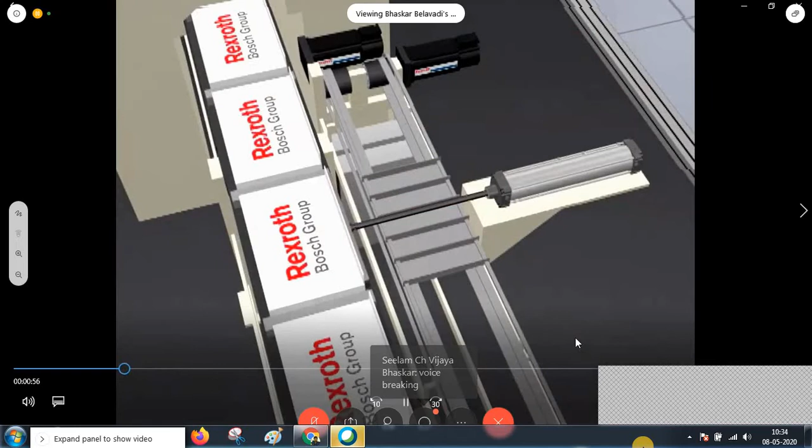Irrespective of whether you wish to produce and pack chocolate bars, fill bottles, or palletize yogurt for transportation, with Bosch Rexroth, the drive and control company, it's practically child's play. Why? Because it's at home in your branch as you are. Our optimized drive and control solutions will provide you with continuous and versatile automation.

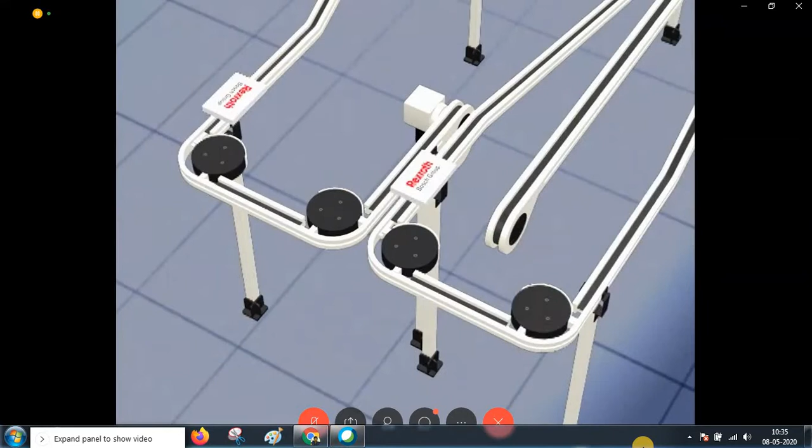An example of chocolate bar production will demonstrate the advantages of precisely aligned electrical, pneumatic, and mechanical drive technologies available from Rexroth, and show how productivity in your individual application can be boosted with increased clock rates, faster format changes, and higher product quality. Competence in total line automation.

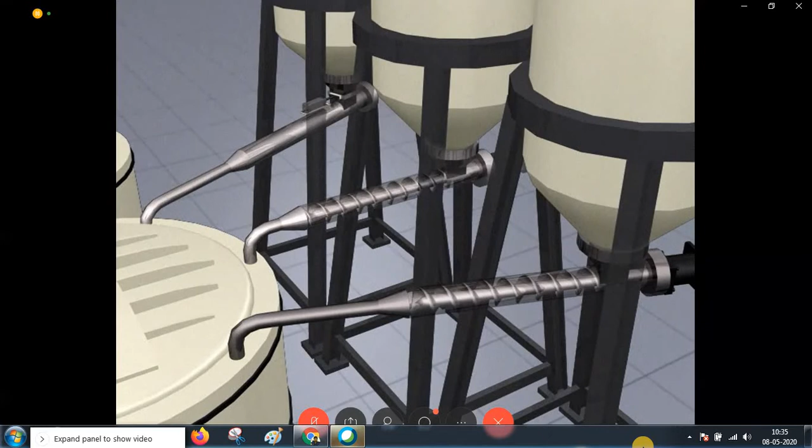Starting with making the raw chocolate mixture provides constantly high chocolate quality. At the start of the process, ingredients are continually fed to the mixer by way of speed-regulated drives for auger filling. Easy-to-clean, hygienic pneumatic cylinders are used to batch the ingredients to precisely match the recipe. Finally, high-performance Rexroth drives ensure the chocolate raw mixture is always homogeneous, both in the mixer and emulsifier.

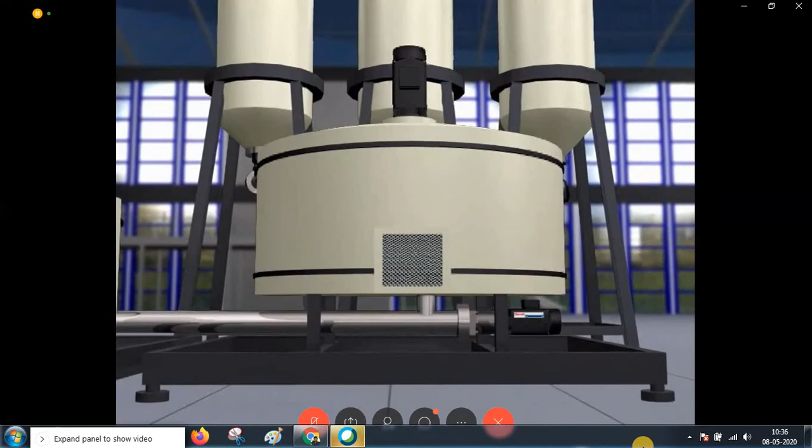Electrically driven transfer moves the mixture to the conching process. Here too, Rexroth drives are guarantors of a constantly high product quality.

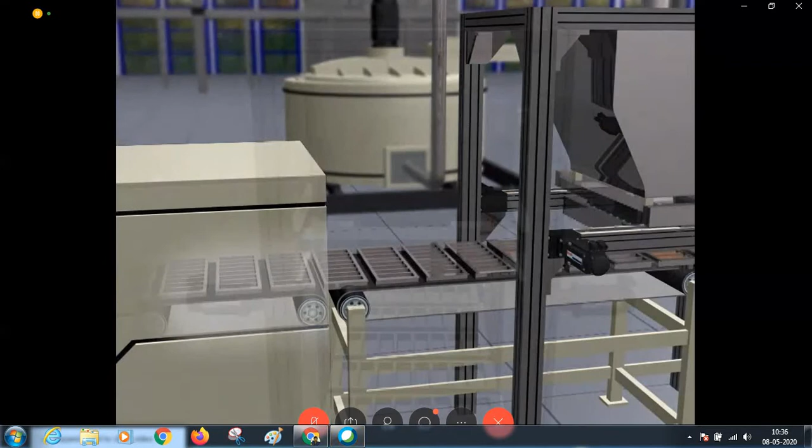Innovative automation concepts with digital servo drives, corrosion-resistant pneumatic cylinders and valves, as well as hygiene-compatible linear modules, ensure high-precision chocolate molding. Here, the intelligent control technology coordinates all movement processes. After the cooling process, highly dynamic linear motors decorate the bars to perfection in accordance with individual requirements.

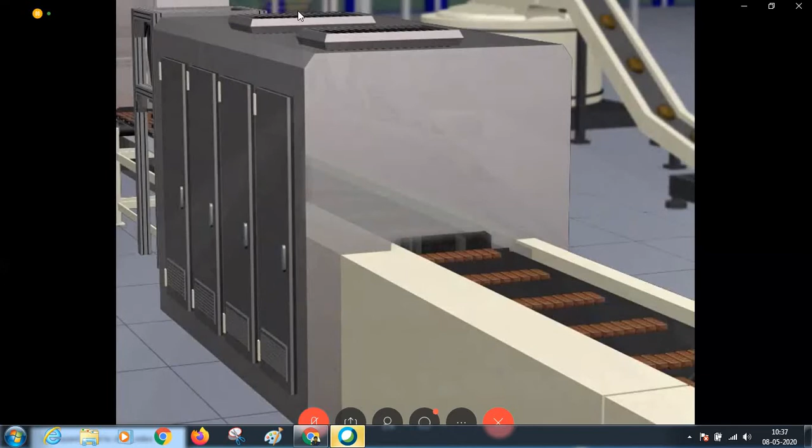After yet another cooling process, the electrical control and drive technology takes over the high-speed sorting of the chocolate bars. The result is precise, exact, uniform product spacing for the downstream packaging process, flow wrapping. Here, the continuous synchronization of product and package serves to provide perfect longitudinal and cross-sealing, thus subsequently an ideal presentation of the chocolate bar at the point of sale.

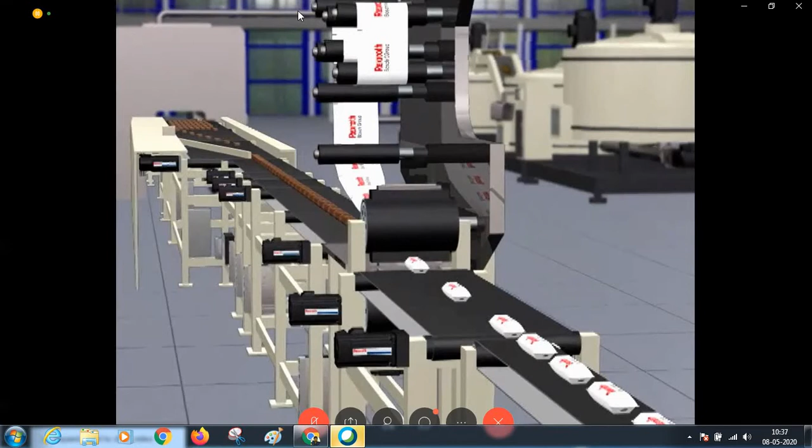Carton making places high demands on dynamics and accuracy. Rexroth guarantees increased clock rates through a perfect combination of electronics and pneumatics. The electrical drive and control technology synchronizes the magic belt and coordinates a protective infeed of the products into the secondary packaging process.

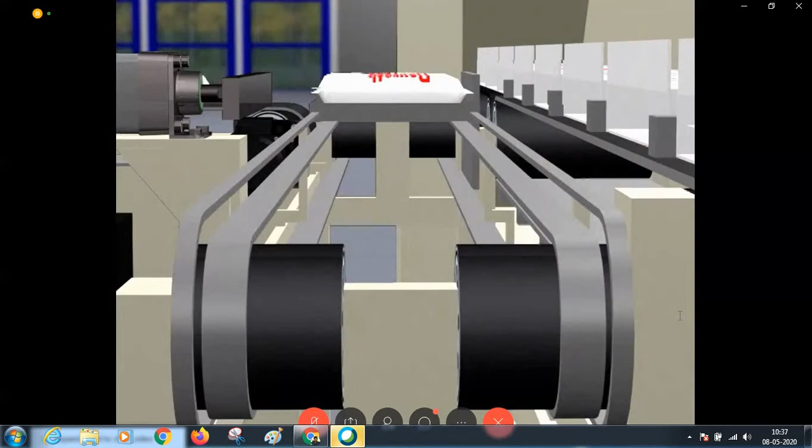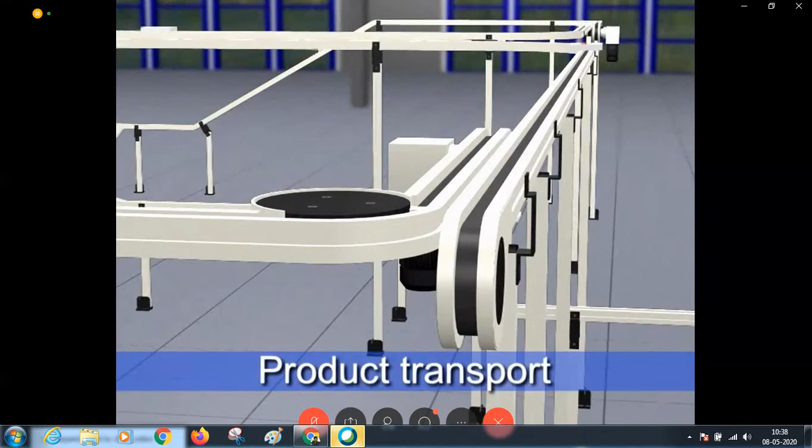All conveyor tasks related to the packaging process are mastered perfectly by the modular Rexroth chain conveyor system. It can be individually adapted to meet your product requirements, and because of its versatility, it's suitable for both horizontal and vertical product transport.

While pneumatic grippers make sure that the blanks of cartons are handled carefully, the intelligent servo drive technology and ready-to-install linear motion systems erect the cartons.

Fast SCARA robots made by Rexroth, with high-performance control, standard program interface, and integrated image processing, serve to make product handling more versatile during case packing.

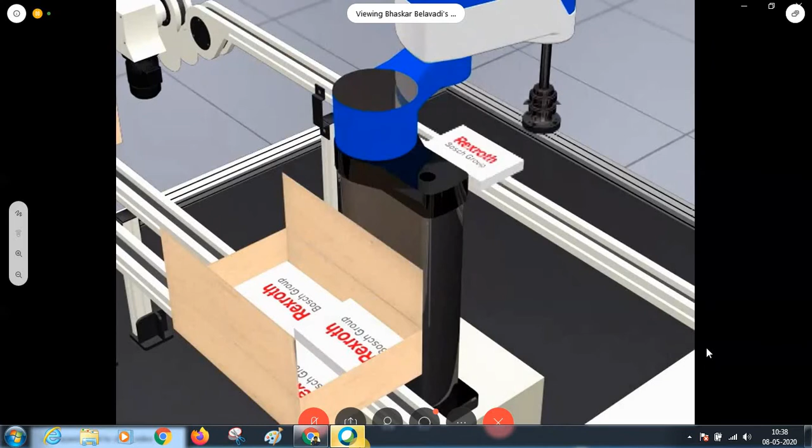Reliable, fast palletizing with gantry robots is an ideal example of our efficient automation solutions, economic from project planning to production. Integrated robotic functions into the control shorten both the project planning and startup times.

Safety fences made up from our modular aluminium profile construction kits are easy to handle, providing maximum protection for people working at the machine and on the transport paths.

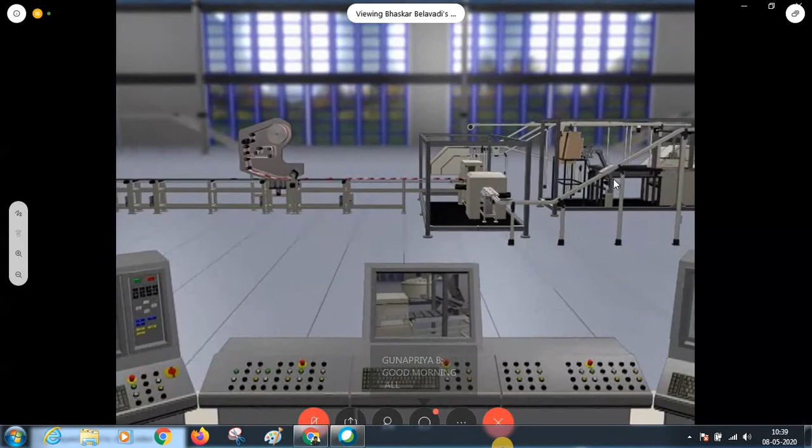Open motion logic solutions as provided by Rexroth provide greater transparency and efficiency in your production. Field buses standardize the connection to the local control systems of the production control center. Synchronization of the machines and individual units by means of cross-communication enables the modular design of innovative machine concepts to be realized. Networking the systems using Ethernet provides you with central access to all production technology relevant data.

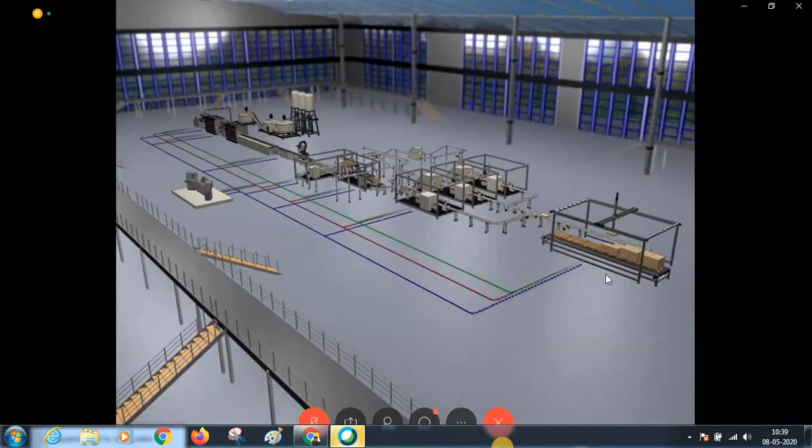You can count on our comprehensive technology solutions with best-in-class components and our local specialist teams around the world. Rexroth, competence in total line automation.

Okay, that was a small video about 6 to 8 minutes on automation. It was basically concentrating on the chocolate manufacturing and packaging industry.

So I think you got some feel about how industries deal with this automation, and why this automation is really required. Every day lots and lots of production is going to happen, and things need to be very precise. So if there is a lot of human intervention, obviously humans are more prone to error and commit a lot of mistakes. So a large production will have a kind of setback if too much human intervention is there. So automation is always kind of required.

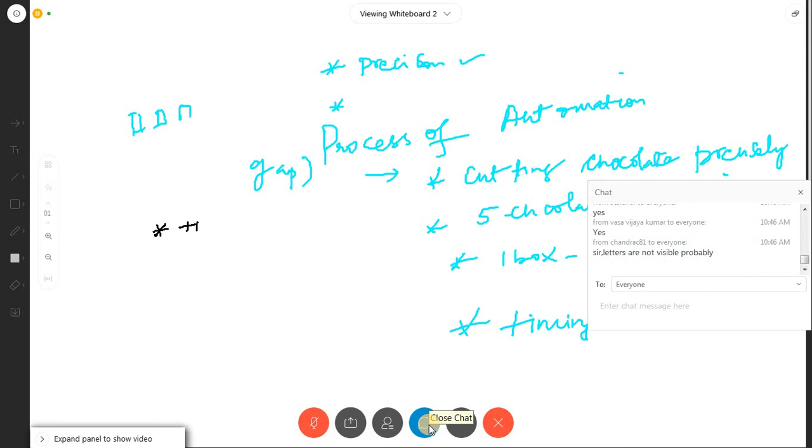So in simple way, I can just say be interested in timing. You would be interested in counting, and you would be interested in keeping all these things intact, like a proper control of the entire process. So all these things we are basically supposed to do in the process of automating any production unit. So now the thing is getting to know what automation involves in it. Timing is required, counting is required. The entire process needs to be controlled in the right way. So a lot of logic is all the time involved in doing all these things. So having said all these things, now I think we need to get into the actual automation.

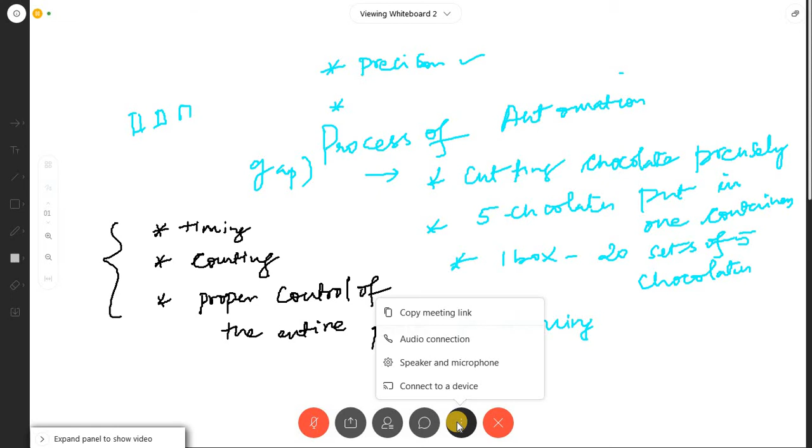Now we need to get into the actual automation thing, so where we will understand how automation is really achieved. So to again get to know how automation is, how the kind of industries were operating earlier, I would like to again show you one more small presentation where you will get to know how it was earlier and how it is now.

Are you guys able to see this?

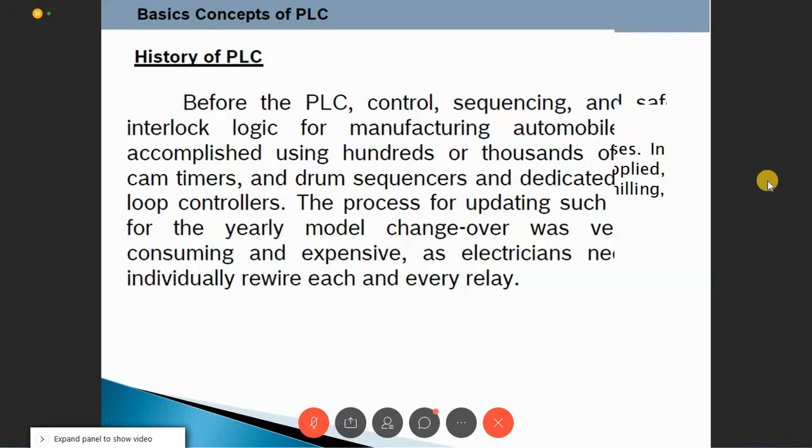So now the concept of PLC has come into picture. The PLC is basically a kind of computer, I can say, which controls industrial machines and processes. And in different areas of industry, PLCs are basically being applied, like in case of handling materials, packaging, palletizing, milling, boring, grinding, filling, sorting. You take any kind of operation that happens in industry, everywhere this PLC is basically used.

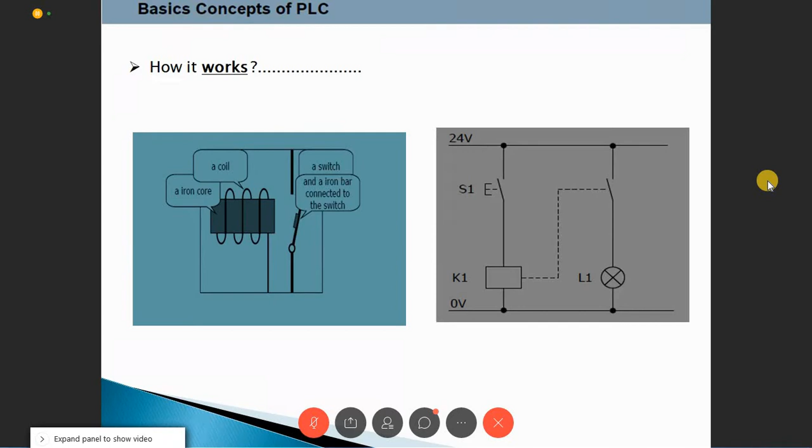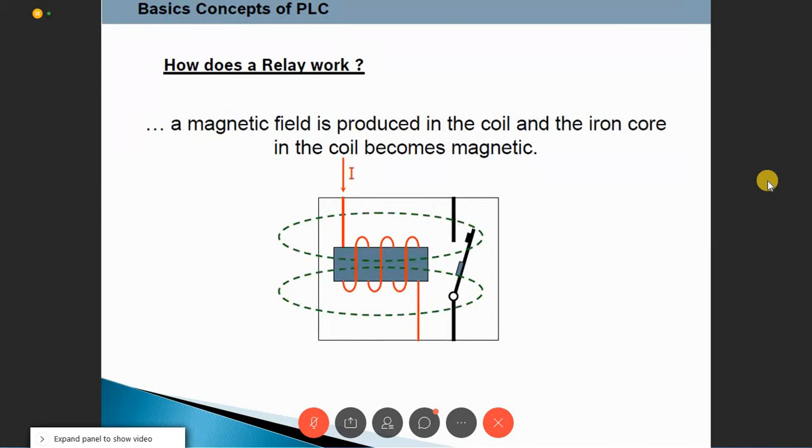With logical relays - now, what is a relay? Relay is basically a combination of a coil and a contact. All of us know how it works. Now, what you can observe here, shaded with blue, is basically the relay where you have a coil and you also have a switch. So when the coil gets energized, the switch is going to get closed, and the current will flow. That is how basically a simple electromagnetic switch or relay is going to work. So this is depicting how basically a relay is working. Whenever a coil gets energized, the magnetic field will be produced, and the contact will be pulled towards it. You can see there is a make in the contact, and the current will flow in the contact as well. So the entire PLC, the programmable logic controller, is based on this concept of relay. So what a PLC involves is basically relay, that's it, nothing else.

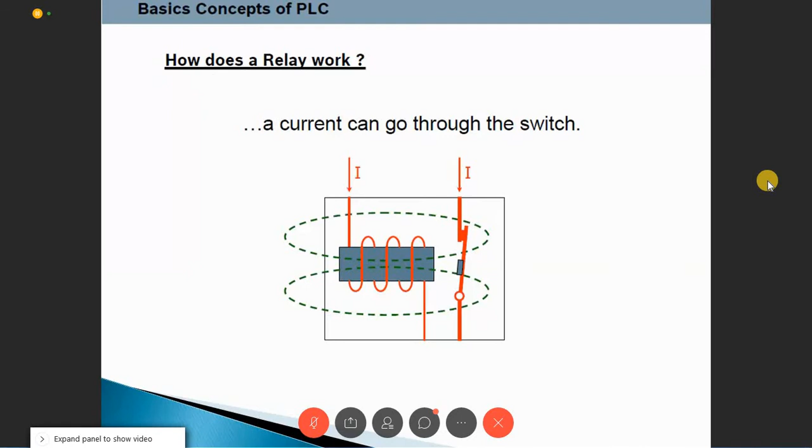And it is just a simple I/O box. So between the input and output, what it has got is a number of switches in it.

Okay, I think this much is enough for us to understand what is a programmable logic controller. So in simple words, to make you understand what is a PLC, I can just say it is a small box which contains logical relays. You do not have a physical relay, and that makes a difference.

When I say there are thousands and thousands of physical relays, maintaining them, if anything goes wrong in between, maintaining that becomes a difficulty. So in case of PLC, what we have is all kind of logical relays. You physically don't see a relay, but you say that there is a relay inside it.

Lakhs together of relays are, we are able to realize using a programmable logic controller. The name itself says so - the controller is basically logical in nature, and you write a program to control the entire operations, whatever happens. So that is basically a PLC.

I hope you got this point of what is PLC. Any question at this point? Any question about what is a PLC and kind of stuff? Okay, good. Thank you. So having said that, now we'll get into the PLC now - the multisim part.

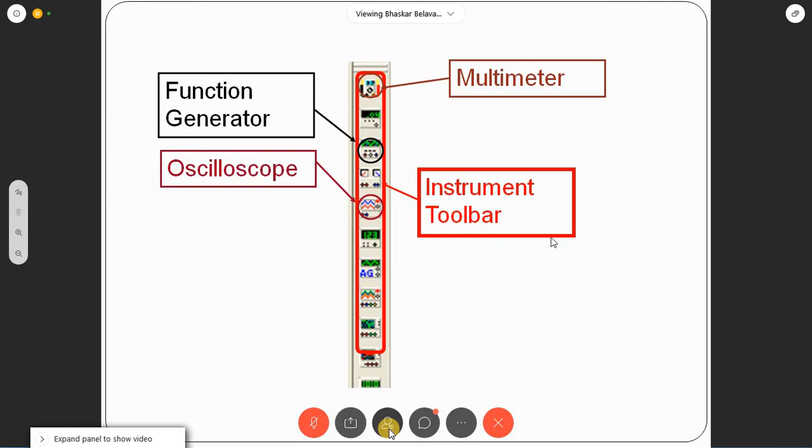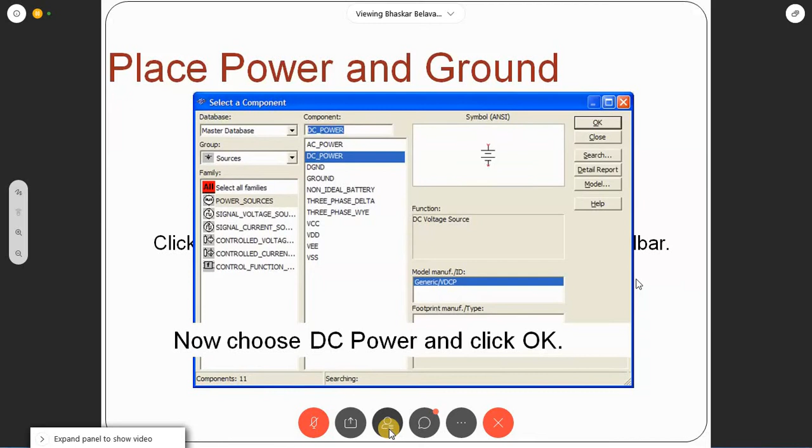This is also the instrument toolbar, where you can find function generators, on the right side. If you see the Multisim screen to the right side, you can find the multimeter, function generator, and other things. We will do these few things later; I just wanted to show you quickly what this entire window looks like and what they are.

So what we'll do is quickly simulate one simple circuit. My idea here is not to focus too much on the circuit part, but on the ladder programming part. I'll use one or two simple circuits to show how Multisim can be used for simulating any kind of circuit. So this is Multisim.

Now let's say I want to simulate a small circuit, a simple voltage divider network. What will you do? You will go to Place Basics. If you see the component toolbar right here, you go to Place Basics to find what's required to build a simple voltage divider circuit. We may require 2 to 3 resistors. Let me try to simulate a small circuit now.

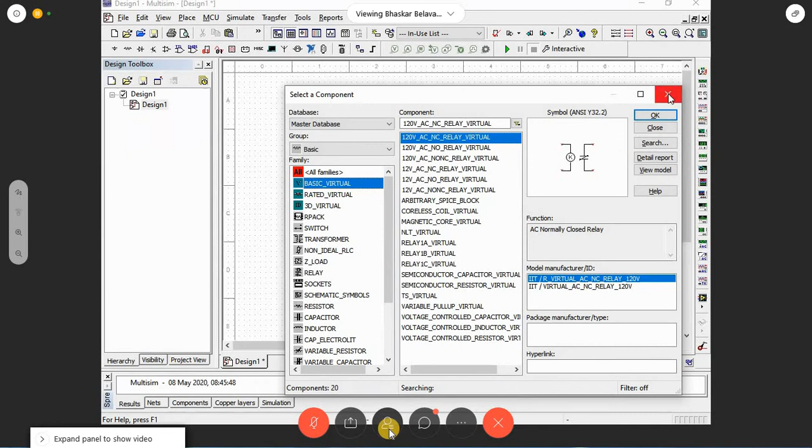I'm not really worried about the kind of output I get, but I just want to give you all a feel of how to use Multisim for rigging up circuits. This is a very simple circuit. Once all 3 resistors are placed, I can take one more resistor to have output across that, so let's say one more 1K. So I've placed 4 1K resistors. You can use any component of your choice, but I've placed 4 resistors right here.

Once that's done, you can think of using a supply. Let's say I'm going to use a DC supply. Where do you see DC supply? If you go to Sources, you'll be able to see under Power Supply, DC Power. I'll place a DC power supply. You would also want the ground there, so I'll use the ground. Anything else required? As of now, I think these are more than enough for me.

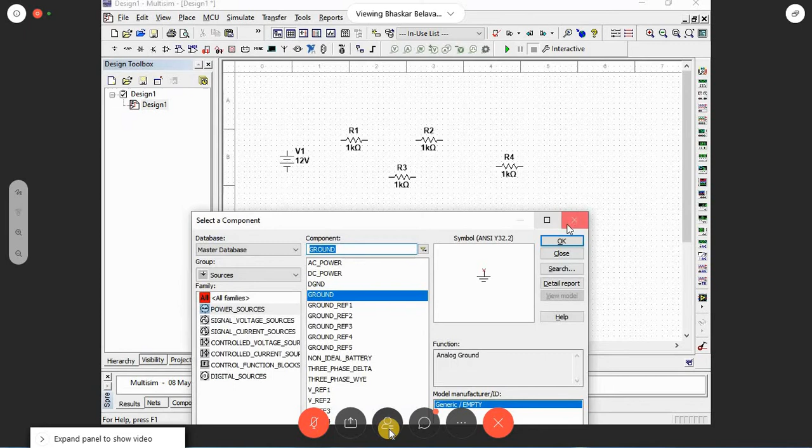So I'm going to arrange all these things in the right way: one 1K resistor there, one more resistor here, one more somewhere in the middle. If you want to rotate a component, right click on it and it'll give you rotate clockwise or anti-clockwise, whatever you want. Just right click on the component and you'll be able to do whatever you want.

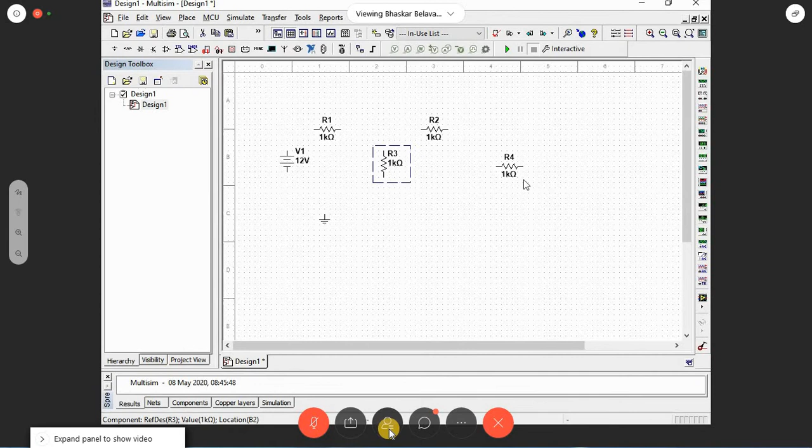Now if you want to alter the values of these resistors, you can double click on the individual value and make changes. Let's say I want this resistance as 2.2K, this one as 5K, and let this be 10K resistance. So any value of your choice.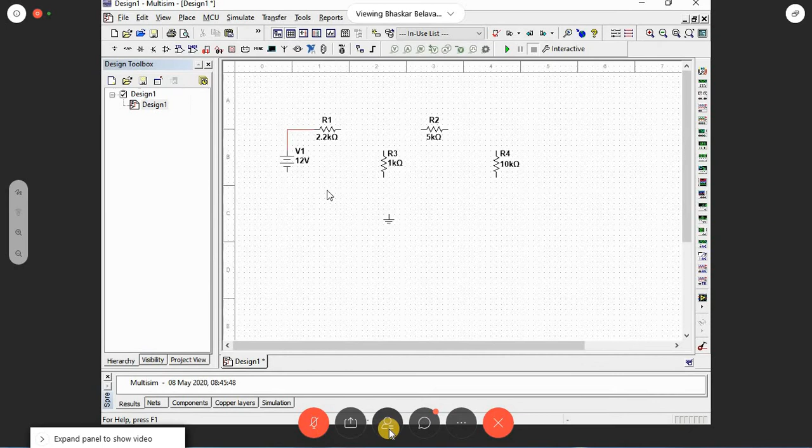Now you need to do the connections, interconnecting all these things. I'll start from the supply side, clicking on the tip of the particular component. The moment I bring my cursor towards the tip, it shows me the wiring connection; you can just drag and drop that wiring wherever you want. Likewise, go to the other side, click on that edge or tip, and connect the ground. Do all the other connections the same way. I hope all of you are able to do it.

So we are done with the connection part. A simple resistive circuit is rigged up now. Now I would be interested in measuring the input voltage as well as output voltage. So what I can do, we can go to the right side of the window, where you can see many components or equipment placed, and I will choose a multimeter out of it. So the very first component you see is a multimeter. I'll take a multimeter, click on that and place it here. Here you can measure current, voltage, resistance, and power as well in dB.

So I'll be interested in measuring the voltage. So I'll connect the positive to this point and negative to the other side. I'm done with it. If you want to measure the input as well, you can do it, but right now we may not require that because I know the voltage is already 12 volts. So I may not require a multimeter at the input side.

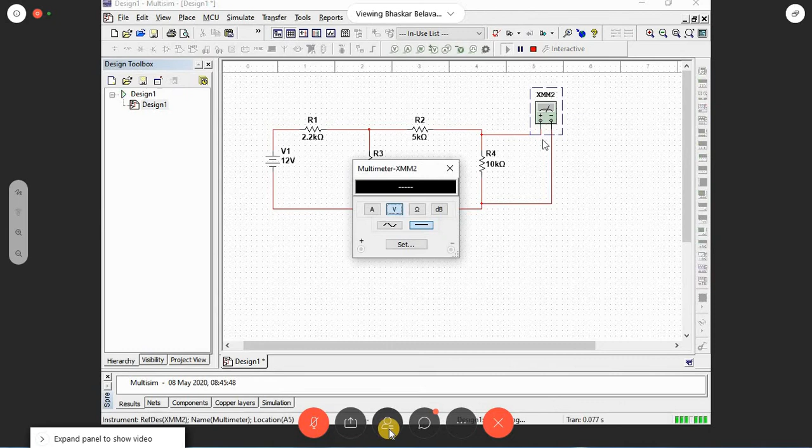Now we can run this simple simulation. To run it, we're going to use this play button. This is there exactly above the circuit. In the last row of the toolbar, you can see run, or I can press F5. Both will run the program. To run it, and double click on the multimeter to see what is the voltage that drops across the 10K resistor. This is the voltage that it gets.

2.39 volts. This is the voltage what you are getting.

So this is how we basically do the simulation part, and the same circuit can also be taken to Labview as well. Probably this is not the right platform to understand all those things because we need to move ahead to the ladder programming part. So I think this much of introduction is enough for all of us to understand how we can rig up circuits using Multisim.

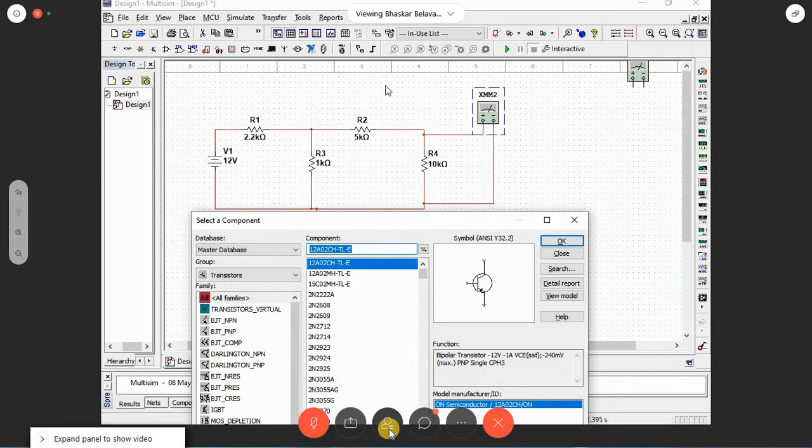And you can find all different components. You can stop this and try to discover the different components that are there in Multisim. So almost 17,000 different components are available in Multisim, and you can have your own component designed as well. So if you want a particular transistor of so and so configuration, that is also possible with Multisim. So a lot of things could be done. It's very user friendly and versatile. Everything could be done with this Multisim.

So having said that, now what we can do is we'll quickly try to get into the ladder part of it, the ladder diagram part. So again, I would like to share the whiteboard before we start inserting the ladder or writing the ladder logic here. So what I can do is I can just create one more design, a new design, and keep it empty for the time being, so that once we complete understanding how and what ladder diagram is and how to write it, we can come back here and start inserting all those things we learned in the coming discussion.

I'm sharing the whiteboard now. I'll just try to explain a few basic things about ladder diagram. Then we should.

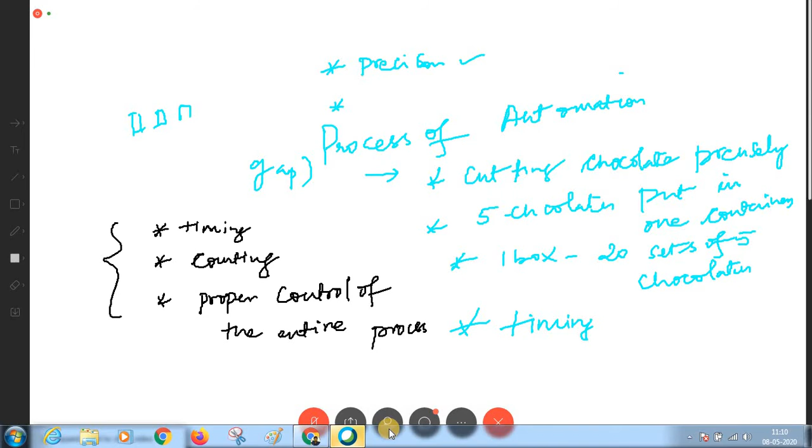So before I explain what is ladder logic and all these things, I would like to take one example here. Let's say I have a small job to be done. There is a lamp, let's say, that has to go on. The moment I put on the switch, let's say I have a switch S, and this is a lamp, a small job that needs to be done. The moment I turn on the switch, the lamp should glow. What is the job? This is basically for understanding; this diagram is fine.

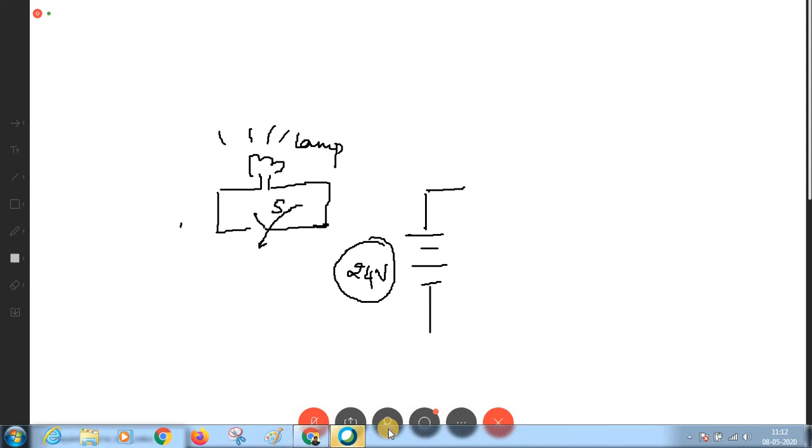But when you try to write this as an electrical circuit, how will you write it? How is that you are going to write it? So you would obviously require a supply, because without a supply, even if you have a switch or a lamp, it will not glow, even if the switch is placed. So let's say we are going to have a supply of 24 volts, and there is a point behind taking this 24 volts, which I'll tell you shortly. Then you have a switch, then you have the lamp.

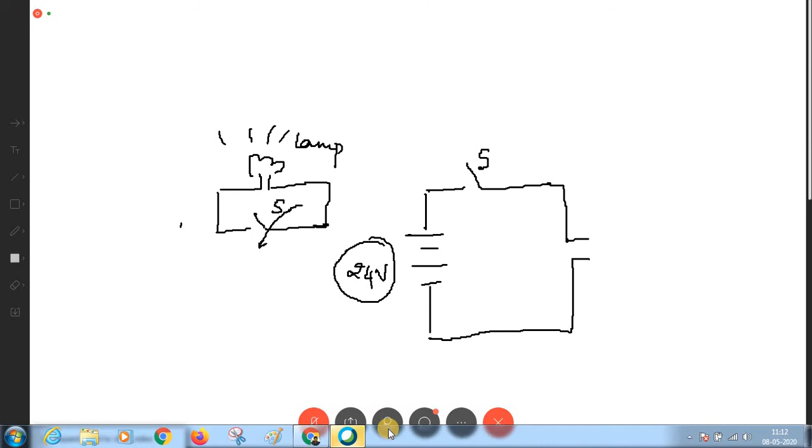Let's say this is a lamp, and that's an output for it. So what you are doing is giving an input and expecting an output from the circuit. These two things you are doing. Input is given by the switch, even though you have a supply, which you will understand now. Now this becomes an electrical diagram.

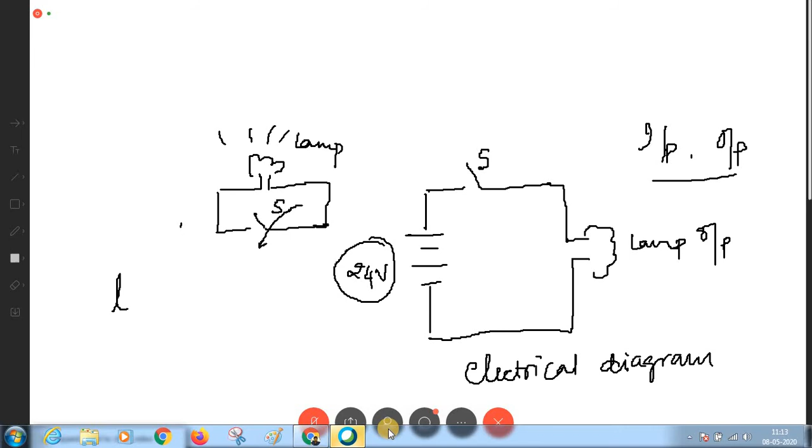Now in the same example, if you want to implement it using a ladder diagram or ladder program, you need to understand a few terminologies which are used in ladder programming, and you will also understand why we call it a ladder program.

So what we may require will be a contact, which I have called S. You would require a supply of 24 volts, and any circuit will also have a ground, which is pretty important. The supply includes 24 volts as well as 0 volts, and it requires an output, which is the lamp in electrics.

So in writing the ladder program, you need to identify these things, what all are required. In my simple job, where I want to switch on the lamp using the switch and a 24 volt supply, I would just require a single contact, a supply of 24 volts as well as 0 volts indicating ground, and an output which is the lamp.

Now when I say contact, what kind of contact am I taking? Normally, under normal conditions, the status of the switch is open. Until you operate on it, the status remains open, which you call a normally open contact, NO. So if there is a switch which is normally open, there should also be a switch which is normally closed.

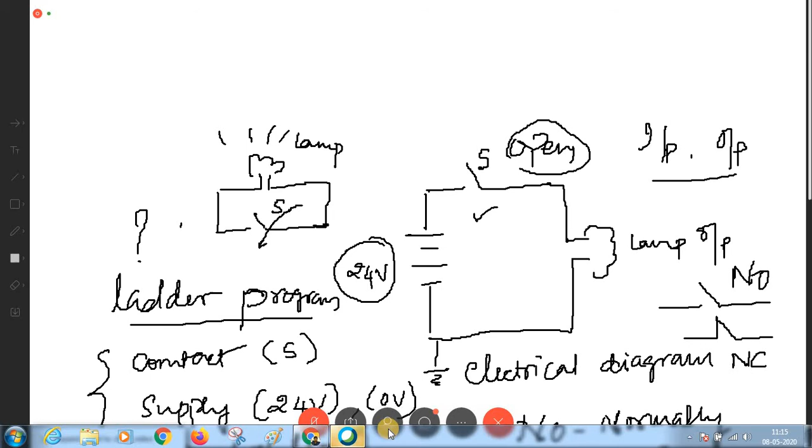A normally open contact is indicated like this. This is a normally open contact. How would you indicate a normally closed contact? A normally closed contact is indicated like this. Now these are in the electrical sense. When you write the electrical diagram, these are the representations we use.

But when it comes to ladder programming, there is a small change in the indication. A normally open contact in ladder diagram or ladder programming is indicated like this, just like a simple parallel plate capacitor. This is how a normally open contact is indicated, and a normally closed contact is indicated like this. So I hope till here things are clear.

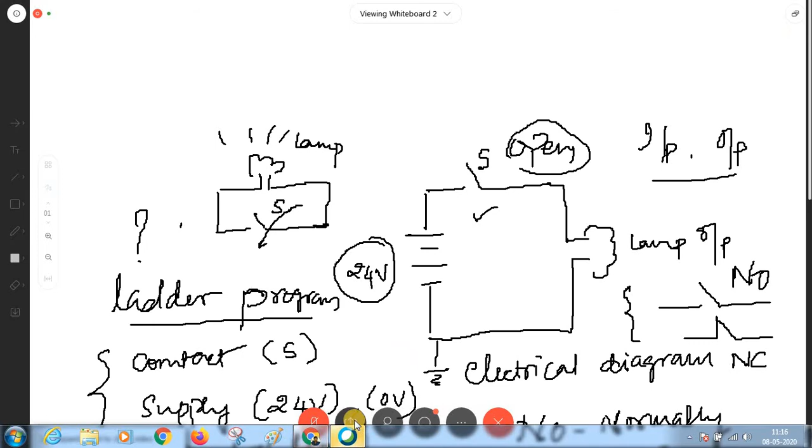Okay, so you know there is a word called reverse engineering, and you know there is a word called Indian pharma industry. Reverse engineering - if there is any question asked, please let me know.

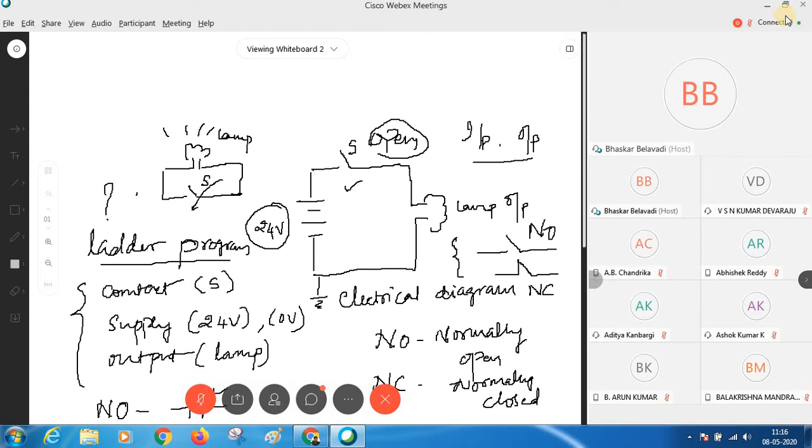Now we are actually getting into the groove of Multisim with automation. Before this was agreed upon, initially we had discussed the PLC part. Probably most of you may not be clear with that. Anyway, you will get to know once I start doing the ladder programming, you will have the feel of PLC as well as automation. So not to worry, but right now just try to understand what is done here. These are the important things you would require in understanding the automation process as far as usage of PLC is concerned in industries. So let's stick to these two notations now, normally open as well as normally closed.

Further to it, you may also require an output. An output is normally indicated as a coil in case of a ladder diagram, all the time. And how is a coil indicated? You normally indicate it either this way or like this - it's one and the same. So this is how an output is indicated.

So now we'll try to write the ladder program.

We'll start with the basic level of writing the ladder program. I'll be writing two lines here.

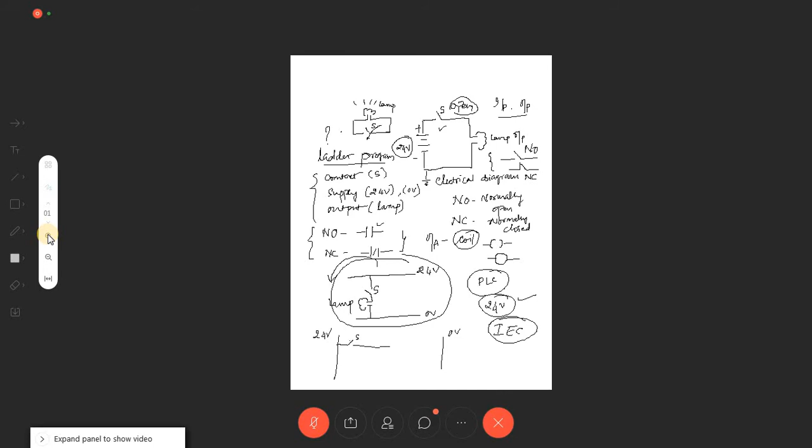So I hope all of you have noted this, in the sense you remember what I've written here, because you may require it for the next part. So I'll erase all these things and start with the previous part. My job was this: I'll just write only that electrical circuit.

Okay, so I have a switch, I have a lamp. Here's the hand. And okay, right.

So I'll say 24 volts above, 0 volts below, and I'll be just inserting the switch as well as the lamp. Now, this diagram and this diagram are kind of identical. There's absolutely no difference between these. The reason for writing this particular circuit or representation is to bring this electrical diagram into the ladder diagram. So writing it this way makes it easy to show how to write the ladder diagram. It's just an intermediate representation of the circuit. So when you tilt this diagram anti-clockwise by 90 degrees, you'll get this is 24, this is 0 volts, and in between you have a switch and a lamp.

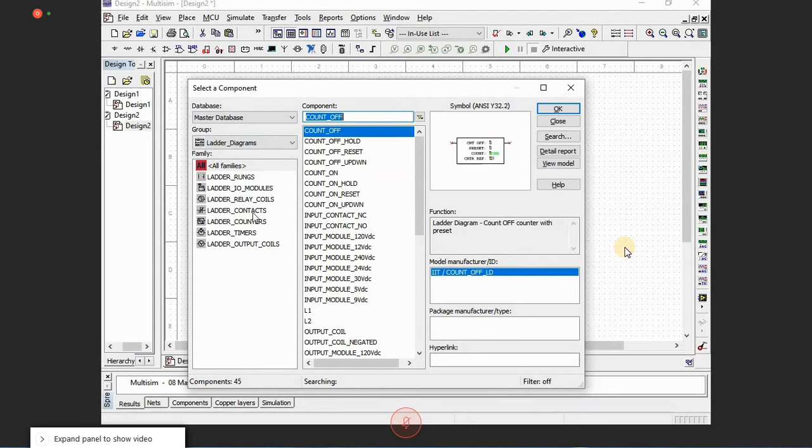Now there are four different contacts in it: one is input contact NC, input contact NO, relay contact NC, and relay contact NO. Do not choose the relay part, choose the input contact part. Now what kind of contact are we interested in? We are interested in a normally open contact. So choose a normally open contact.

And if you can see, this is exactly identical to what we wrote there. And at the same time,

You would be interested in placing a lamp. So if you do not know where to check or find the lamp, you can just directly type lamp here and go to all groups. Now these are the different families of groups that you have got: sources, basics, diodes, transistors, analog, TTL, many things are there. Even the ladder diagram is also a part of the group. So you can select all groups and just type lamp, or search for indicator. Let me type it as lamp.

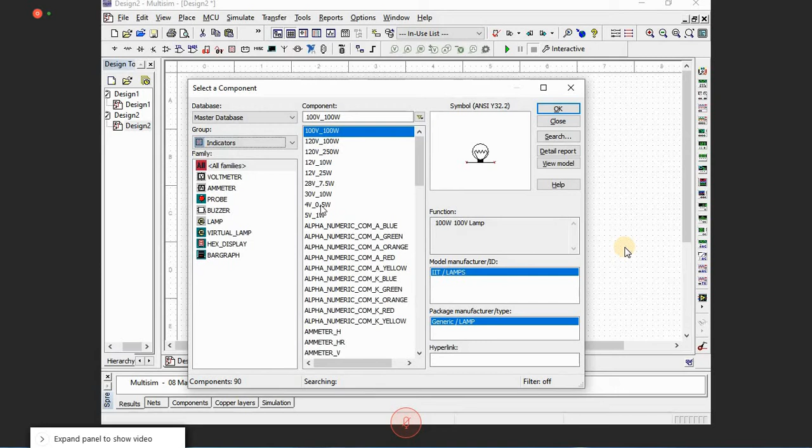Do this. You can see indicators right here. Under all groups, you can see an indicator. So I'm going to place, let's say, 28 volts, 7.5. I'm going to place this. We are done with it.

Now we can run this. Now things are ready, this is what we wanted. Switch on, turn on the switch and the lamp should glow.

We have turned on the switch. Absolutely nothing is happening. I have turned on the switch. Absolutely nothing is happening. Did I really turn on the switch? I just ran the program, but the switch is still not turned on. So we need to turn on the switch.

So to turn on the switch, a small thing needs to be done in this Multisim. When provided by other PLC manufacturers, things will be different. But in Multisim, you need to put one more thing before you run the program, and that is this.

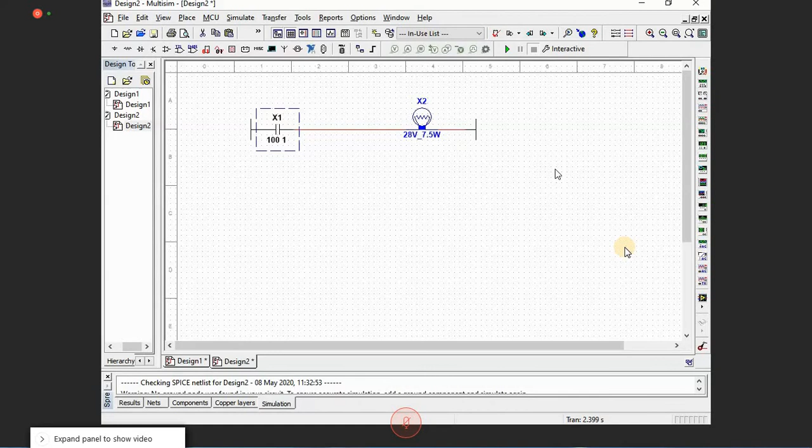Again, go to the ladder program, place ladder diagram. There you can see ladder IO modules. I hope all of you are able to see that. Yes, I know all of you are doing this along with me.

Go to ladder IO modules, then place ladder diagram, go to ladder IO modules, and you can place any module of your choice. Right now we will take input module 24 volts. If you observe here, there are so many modules, and 24 is also mentioned, because as we are doing simulation you can use any volts and try to simulate it. But all standard PLC manufacturers will always take 24 volts. So choose 24 volts and place it here.

Now if you observe something, there's X1, and below X1 something is written, 100 space 1. That indicates that you need an input module, and the identifier of this is same as the identifier of this: 100 for X1 is same as 100 for U1. It indicates there is a reference designated for U1 as well as this switch.

So you should be using an input module to input a value to the switch. Otherwise, this switch is not going to work, it is as good as a dummy switch. This switch will be operated only when you apply something to this particular input module.

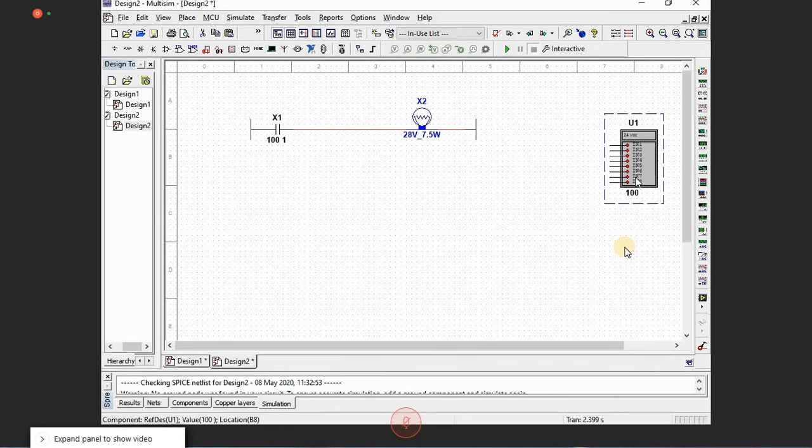Now in this X1, the number is 101, indicating that U1 has got 8 different input pins, and you are going to apply a high signal to the very first IN1 to operate this switch. You got my point? Did you get my point what I said? 101 for X1 is indicating that 100 is basically pointing to the input module, and 1 is indicating the pin of that particular input module. So you should be applying a high to this so that you operate this switch.

So what you can do now is place directly 24 volts, or you can do it like this, which I will show. So what I'll do is place, let me take it from here. I'll be placing a source, let's say a DC power supply, and I will also require a ground. Now you know where these are available, I'll leave it to you to please search all these power supplies, grounds and all those things.

And I would also be interested in doing one more thing, which is a push button in my case. Let's say I want a push button. We can select all family and you'll be able to see this. Select all families, all groups. You can see a normally open and a normally closed. I shall take a normally open.

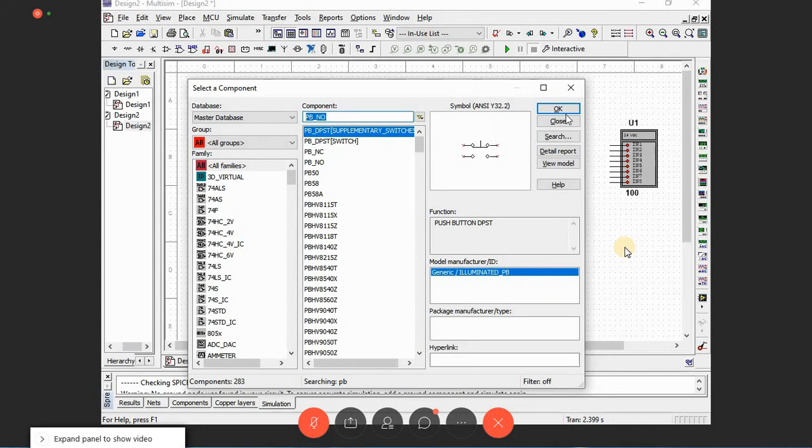I can do the connections. What is the difference between a switch and a push button? A push button retains its state only until we keep it pressed. The moment you release it, the state comes back to its original position.

So now we'll try to see whether it works or not. I'll make this 24 volts. The supply is made 24 volts. Let's see whether it works for me or not. I'll do it again, 24 volts.

Let me replace this. Now what I can observe is this: the moment I close this push button, you're able to see the lamp glowing. The moment I release it, the lamp will also stop glowing. Now we are able to see the operation that is happening.

So the switch is being controlled by this input module through a push button here, with 24 volts applied. Now, these rungs we have inserted will not have any supply as such in Multisim. But when you do it in the real sense, the rungs placed in the real ladder programming language will show all those vertical lines having 24 volts and 0 volts respectively. The whole concept remains the same. There is no change in that.

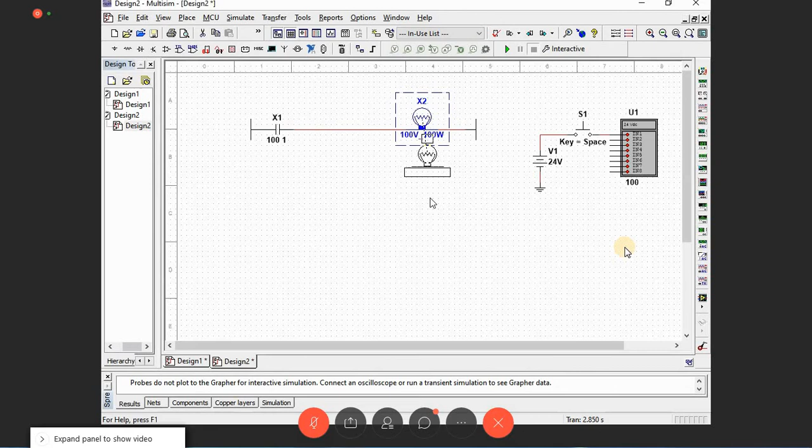So what I can do is, for the time being, I'll just keep these away, lamp. I'll bring in the concept of relay. Now this is where actually, okay, you have still not finished. Please finish this up. Once you have finished, let me know. I'll proceed further with the next part.

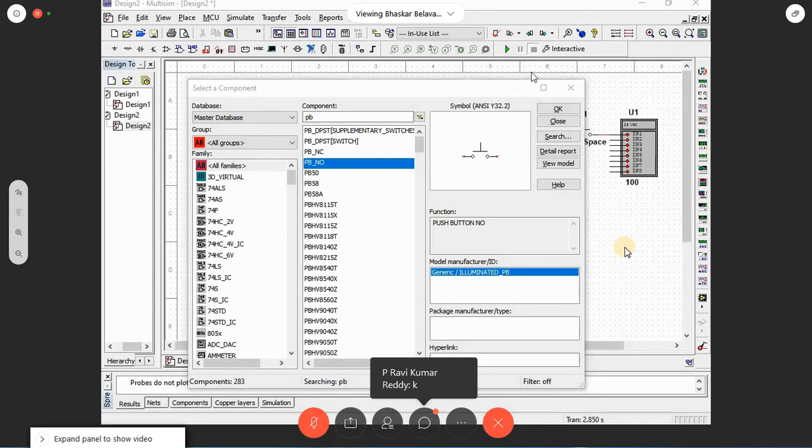In the component search toolbar, you can just type PB. PB stands for push button. It will show you the list, this list. And here you are supposed to select either NC or NO. Right now we are interested in normally open. Push button normally open, to select that.

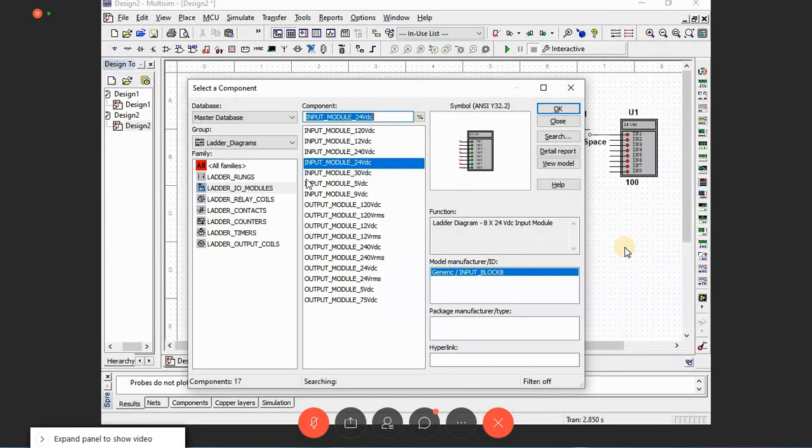I'll go to ladder diagram and go to contacts. Now you're supposed to choose the relay contacts. I'll select this relay contact, NC or NO. I'll be choosing relay contact NO, and I'll place it here.

I'll go to the relay coils and choose a relay coil as well. So remember, we are doing two things: choosing the relay contact, and choosing the relay coil. In ladder contacts you can see relay contact NO, and in ladder relay coils you will see the relay coil. So we are going to choose these two things.

I'm going to place it. Now just look at the placement of these two coils as well as the contact. I'll place the coil I've chosen, which is M1, in the very first line, and make the connections like this. I'll insert one more rung here. You also can do this meanwhile.

I'm placing this contact, which is the relay contact, right here, and I'll place the lamp here. Make sure the connections are made properly, otherwise you won't get any output.

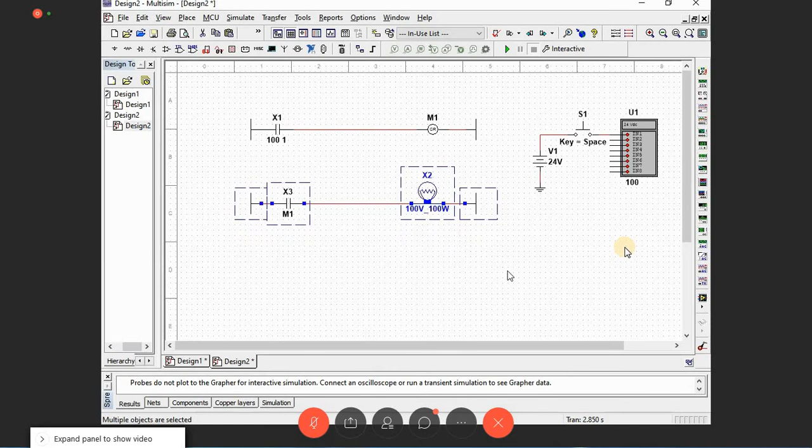I hope this much is done now. Now we will run it. Anyway, it's not going to work the way we want it, but we will run and see what is going to happen. So I'll play this.

I'll run the simulation and press the push button. Now what are we able to see? We're able to see the lamp glowing up. Now the only change between the previous one and this one is that the combination of this coil and contact has come into picture.

If you observe the names given, the relay contact has a name M1, and the coil also has the name M1, which we call the reference designator. M1 is basically a kind of reference designator, so you can change it to whatever you want. Let's say M10.

Simulator is running, I cannot make the changes. You can rename this and call it whatever you want. Yeah, you can make the changes there. So right now you have M1 and M1 here.

So this coil and contact are put together. A combination of this coil and contact is basically a relay. So the entire concept of relay is brought in here. But we are still not able to understand the importance of this relay concept, or what the coil and contact are doing. Now the point was, when I press the push button, we wanted the lamp to glow.

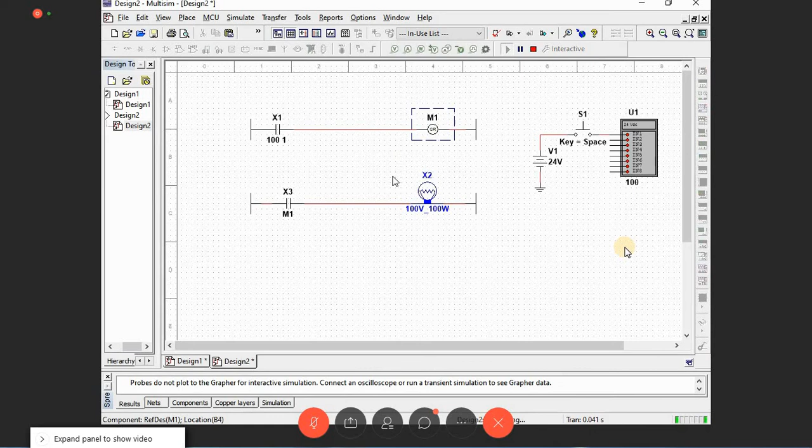So the lamp was glowing, but I want the lamp to continue to glow even when I release it. So what we'll do is make a small further change here and try to add one more contact.

It's normally open, and I'll try to place it here. Please observe what is being done here. I just brought in this contact and connected it across X1, which is 101, my actual push button.

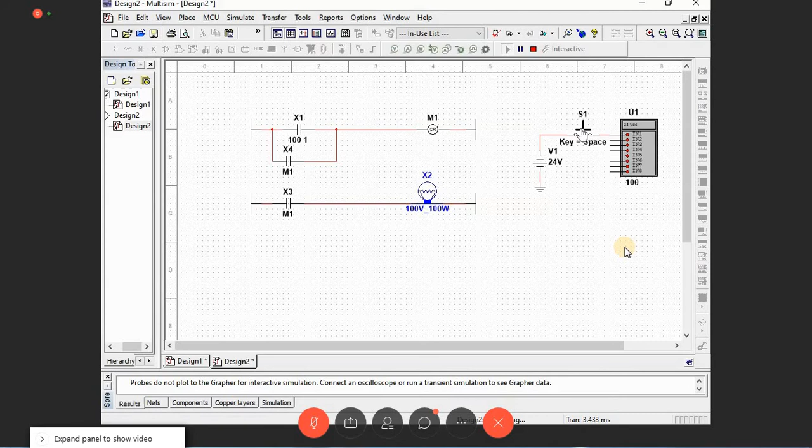Now we will run this and check what is going to happen. I press the push button and release it. Even after releasing, you can see the lamp glowing. Now what is the change that we got?

This entire logic that I've written here is what is called the latching concept, latching logic. So we have latched the input to the output. By making a small change in the entire logic, I'm able to see the lamp glowing even without the push button being pressed. I pressed it and released it, and the lamp continues to glow forever until I stop the simulation. This is basically what is called a latching concept.

Now this latching concept is the most important concept that we use in automation technology. So whatever we do in automation using this ladder programming, we always go for this latching, because everywhere we basically use push buttons and try to keep doing many things using these push buttons, which are actual inputs.

So, got the point? Now, is anybody having a question as to how this entire logic is working? Good, no questions. Thank you. Okay, do you want me to repeat this once?

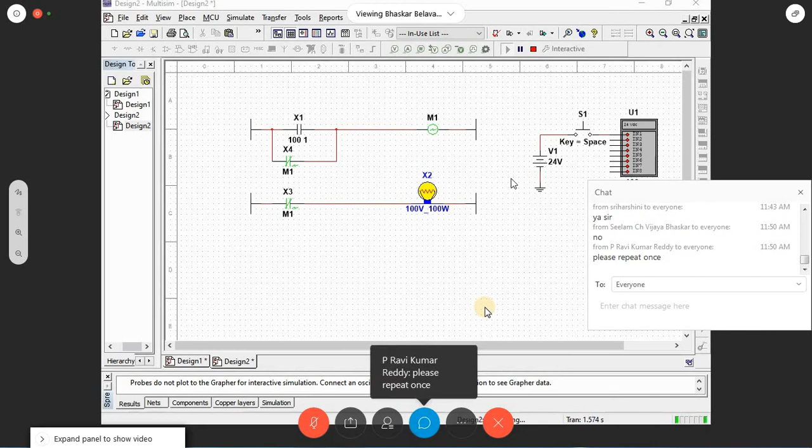Okay, so what was happening earlier? Let me remove this switch for the time being. So what was happening earlier, when I pressed the push button?

IN1 was giving a signal to X1, and X1 would get closed. The moment X1 closes, 24 volts will flow to M1, which is a coil, and that will get energized. There is a coil contact relevant to this M1, which is X3. So once coil M1 gets energized, the contact will also close, because a normally open becomes a closed contact now, since the coil got energized. So the moment this contact closes, the lamp will glow.

So this was happening when you had kept the push button in the pressed position, or in the closed position. But we wanted the lamp to continue to glow even when it is getting released. So in that case, what we did was we provided a separate bar.

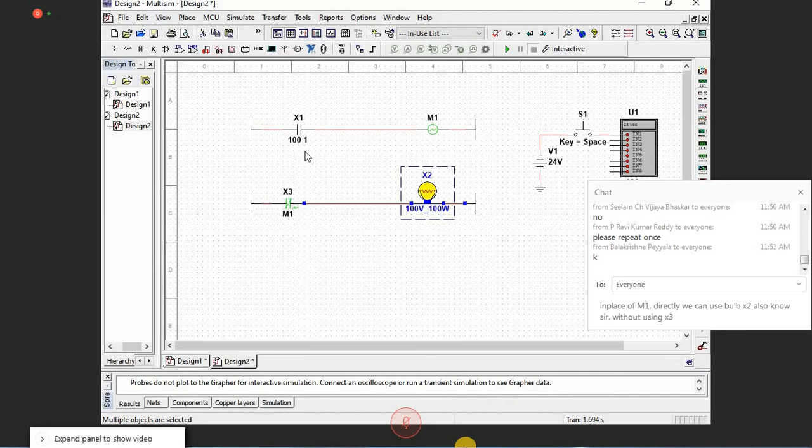From the input side, once 24 volts gets applied to this line, this contact that you had connected across X1 will provide a separate path for M1 to be in the energized state, and that M1 coil will keep the M1 contact energized, which makes the lamp continue to glow. This is what we actually did.

I'll bring in that normally open contact and place it here. I'll connect it like this.

Now the moment I press it, you can see X1 as well as X4 both go green. When both are green, the moment I release this push button - I'm still keeping the push button on condition - the moment I release this, X1 will go off, but X4 continues to be green. You can observe that X1 became black, but X4 is still in the green condition, which means it is still in the high state.

And who gave that high state? This M1 coil gave the high state. This M1 coil, as it got energized, will try to close all the contacts relevant to that coil. So there are two contacts that we are using relevant to this particular coil, and that made the lamp go high. So this is how the entire latching concept is going to work. I hope it is clear.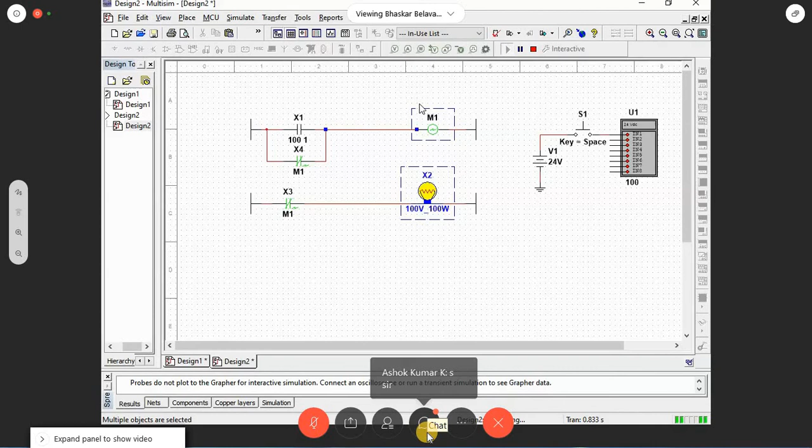So after having said this, what we can do is slightly move ahead and try to understand how we can switch this off. Now I want to switch this off. How do I do it? I don't have any means to switch it off.

Now the lamp got on, but I want to switch it off. The only control that I had was the S1 push button. Now regardless of what I do with this, nothing is happening, I'm not able to see anything happening. So I want to improve this logic - I want to insert something with which I'm able to switch this particular lamp off.

So in that case, what I can do is bring in one more contact. I can place, let's say, a normally closed one this time. Just observe the logic behind this. I'm placing a normally closed now. I'll try to have this number. Now if you want to change this number, you've got this contact as 101.

Let's say I'm going to give the input to this particular switch from IN2. So what you can do is double click on this and write it as 102. And I'll use the same components, or I can directly take this 24 volt from here. I can directly take this 24 volts, and use a push button.

Let me place that here. Calling it S2, I'll take the same 24 volts and give this to IN2 now. Why IN2? Because X5 is going to operate based on what you apply to IN2.

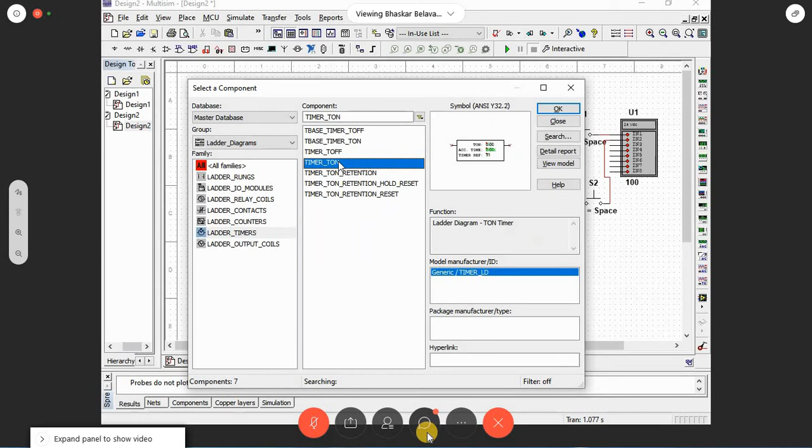Now what is our idea? Our idea is to switch on the lamp after, let's say, 10 seconds. Please remember, what we are doing here is a very simple logic, but the same concept can be applied elsewhere. Whenever you want to do any kind of automation process, the same concept can be extended to any kind of complicated process or program.

So I have inserted something here - you can observe I have inserted something called a T-on timer. I'll click on this, double click on it - I hope all of you got to know how to insert this on timer. So you go to ladder diagram, then to timers, you will see the on timer there. Just click on that and place it here.

Because my interest is to now turn on the lamp after 10 seconds, you will see how it happens. When you double click on the timer, you can see two things: one is the timer reference - you can change this name at any time - the other is what amount of delay you want.

So I just told after 10 seconds, but as I cannot wait for 10 seconds, it's a waste of time. Let me change it to 1 millisecond. So what will you do? You will write it as 1 millisecond - it's anyway there - and say OK.

Now what is the on timer going to do? On timer means that if a high signal is given as input, the timer will start ticking. Once the timer starts ticking, it will go on till whatever delay time you have given. So the timer keeps on ticking till 1 millisecond - the moment 1 millisecond is completed, the output goes high on the timer.

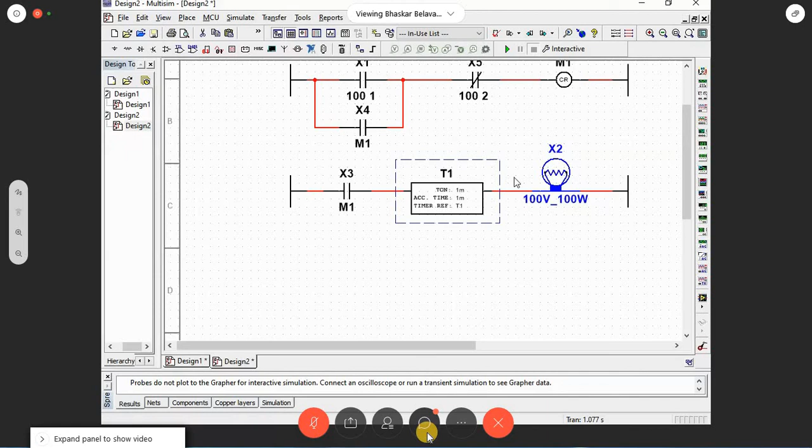I'll have a separate rung, place this timer here, and try to have a contact - I'll try to use the same contact, the same X1. I'm using the same X1. So the moment I operate this push button here, the moment I try to operate...

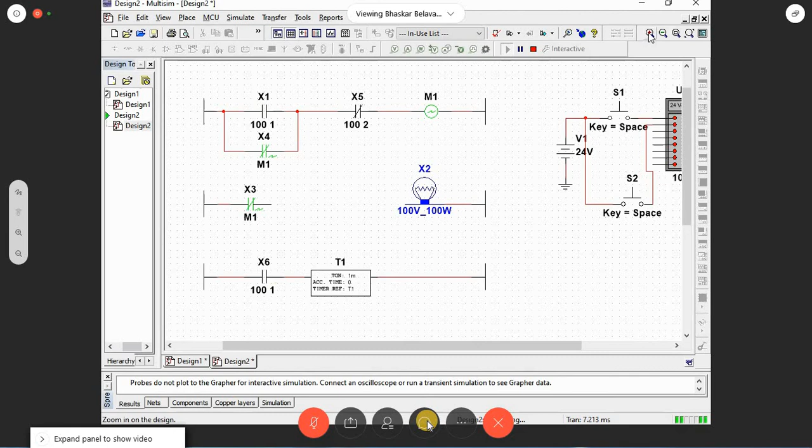I'm pressing this first push button, S1. Observe what is happening to timer T1. You can see the timer ticking there. I'll just enlarge this so that you can observe what is happening. Please observe this timer T1, or you can as well do it on your system. You can see the timer ticking.

Once it becomes 1 millisecond, you can see it's going green, which means that output went high. The moment I release the push button, I'm going to release it now. See what will happen to the status of the timer.

Timer got reset. So the condition for this particular timer to be used here is you should keep the input always in the high state. Until and unless the input what you are giving to this timer is in the high state, timer will either tick or it will retain its state, in the sense once the elapsed time and the preset time become same, the timer will be in the high state.

The moment you disable the input, timer will also get reset. So what you can do now is insert this particular timer into this and see whether you are able to switch on the lamp after 1 millisecond or not. Let me reduce the time to 1 millisecond.

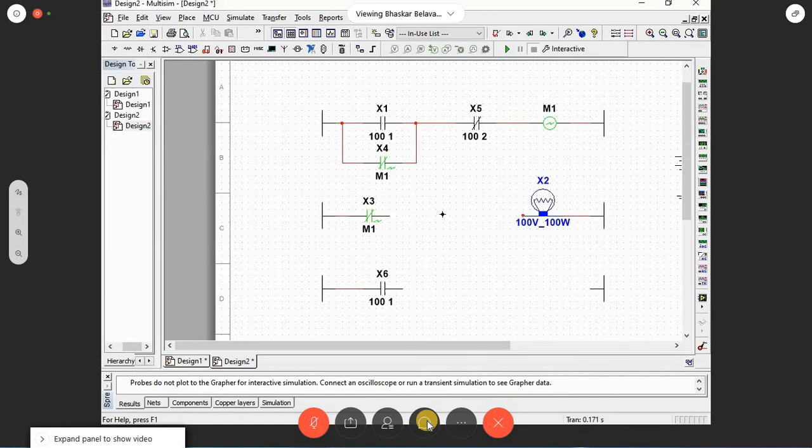Let me delete all these. So we will run this now. So what should happen? Once I press the S1 push button and release it, the timer should start ticking after 1 millisecond. The lamp should glow. Let's see whether it happens or not.

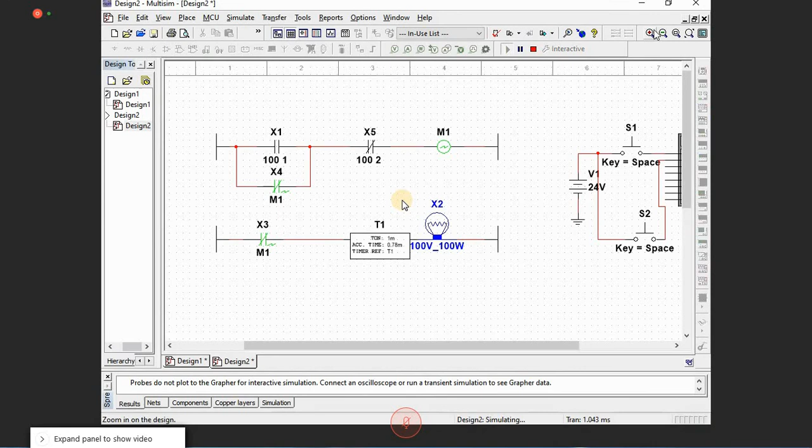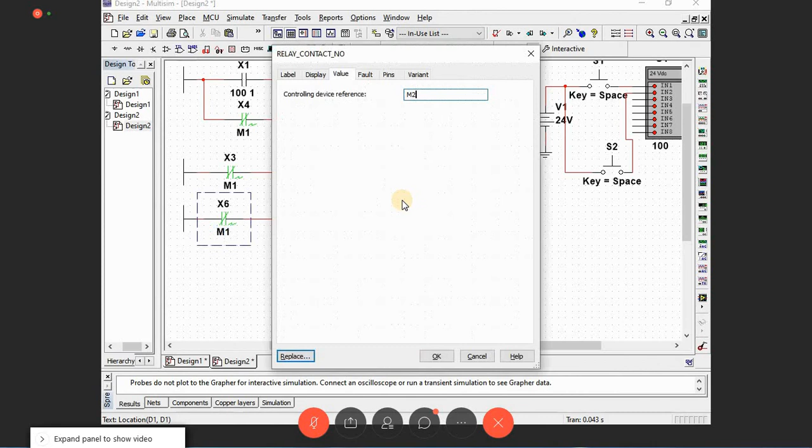Let's see whether it works out. It should work. The whole logic is like this: when you place a timer, the output of the timer will make the coil go high, and the contact will get closed, and the lamp should go on after 1 millisecond. This thing should work. I do not know what is the problem in between. So this is how basically things are going to work.

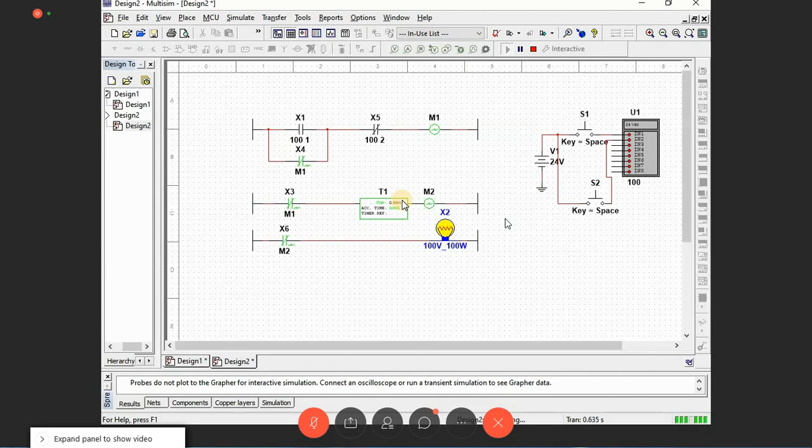There are too many things to really do here. 1 hour or 1.5 hours is really not enough for us to do all these, and we should really have a separate session to understand from the PLC part how we can do all these things. So I think I've tried to give you a feel of the whole automation, or how Multisim can be used to develop the ladder programming. Even though I'm not able to do much in this 1.5 hours, I think I've done a little bit, and I hope you guys have got some input.